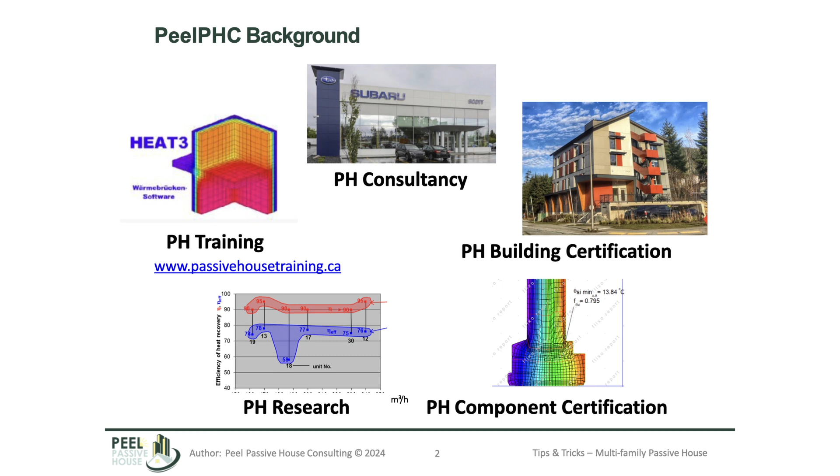So just a little bit of background before I get into my session. At Peel Passive House Consulting, we do everything Passive House. I like to joke that I eat, sleep, and breathe Passive House because it's all I do for work. And we work in a variety of different categories across the Passive House industry, from training, certification, consultancy, component certification, and a lot of research and development. So everything to do with Passive House, which is very nice and refreshing.

So for today's agenda, I'm going to be sharing some tips and tricks that I've learned over my years of experience helping design teams certify Passive House projects. I've tailored it down to the 5 principles of Passive House to make it a bit more common, and I've tried to not get too technical with things. Then I'll talk about some energy optimizations that we typically want to employ in our buildings, and then a bit of a summary of how we can come together with all of these different options to get what we want, which is certification, hopefully.

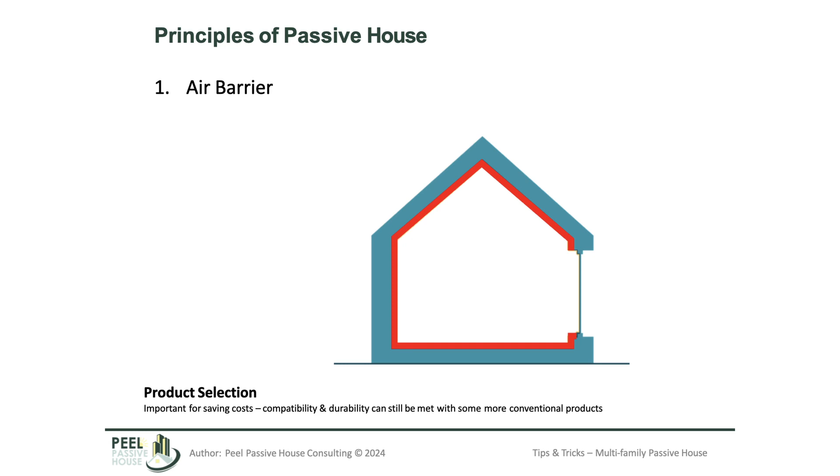So for the first principle of Passive House, we're looking at our air barrier. Everybody knows generally that we're looking for a continuous air barrier. But what we often run into is people getting sticker shock with different pricing and different products, and even unfamiliarity with switching away from what they're used to. When we're trying to use more conventional or more competitively priced building products, because we're always looking at our bottom line and how much it's going to cost us to build these projects, we've had some success over the years with various more conventional products.

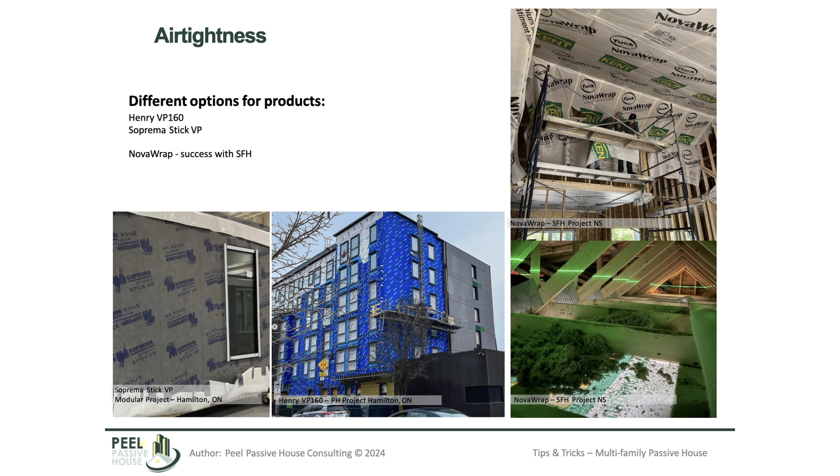So we've had a couple projects use the Soprema Stick VP, we've had the Henry VP 160, and then I've got a project here on the very right-hand side. It's a single-family home where we used Nova Wrap, which is a local product, I believe it's made in Truro. It's my brother's house, and he ended up achieving less than 1 ACH by using that product on the inside of his house. We did all the hygrothermal modeling to determine if he had condensation risk, and it all came out really great. So we're hopeful that's going to have long-term results, which is very exciting because it's a very, very economical product to use.

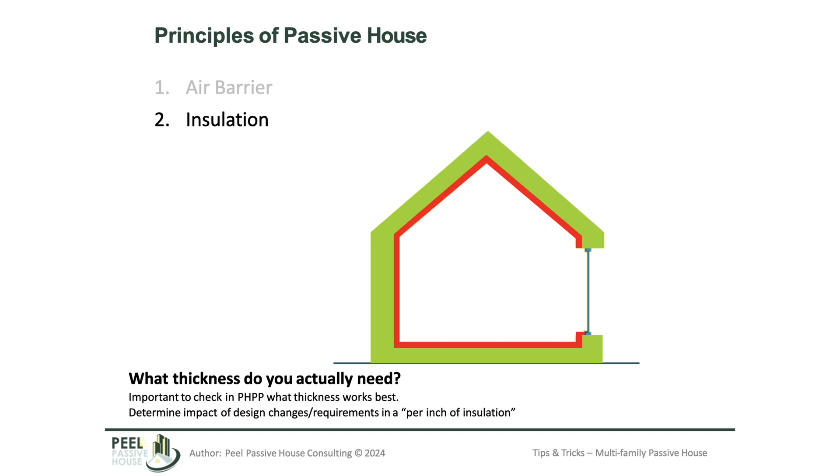Next up on our principles is insulation. Regardless of where you are in our part of the world, you're going to need a lot of insulation to meet Passive House standards. But one of the things we always look back to when doing our analysis for consulting work is we relate any design change to what that is equivalent to in an inch of insulation. So if, for example, you want to change windows or change a different insulation, it all comes back to the knock-on effect: do you have to increase your insulation, or if you've improved performance, can you actually reduce your insulation?

So I've got some really cool examples about how we were able to work through some projects and actually reduce the amount of insulation in our envelope in multifamily buildings based off of other optimizations we were able to make. And here's one of those examples.

So it's kind of important, we find early in design, to carry maybe a little bit more insulation than what we think we'll end up with, just so we have that in the budget or for our model, if we're working with a newer team, for thermal bridging and that kind of stuff. But it just kind of speaks to the amount of insulation and also the size of your project. We find with larger projects, you can actually use a little bit less insulation on your walls and still achieve Passive House standards and still achieve your thermal comfort.

So I had a 4-story building go up in Windsor, Ontario, and we were able to use EIFS with a 6-inch insulation thickness and still achieve Passive House standards. We didn't have to do 8 inches or 10 inches of insulation. So it was kind of impactful. The larger your projects, the more flexibility you have with this. It's not always going to be 10, 12 inches of insulation.

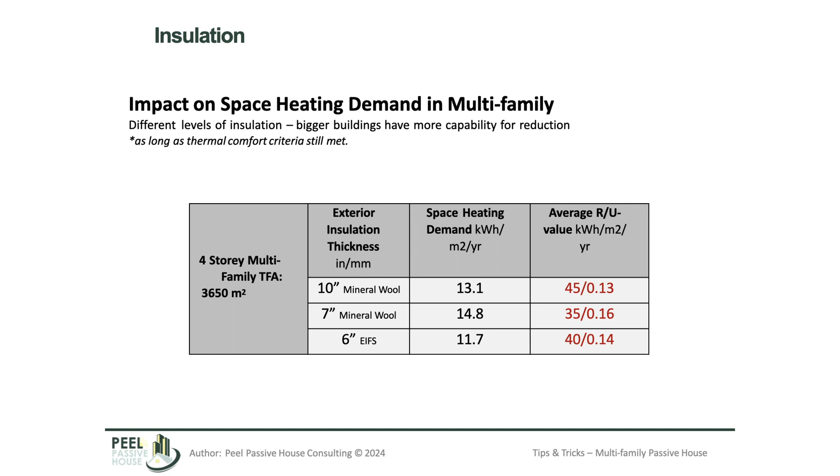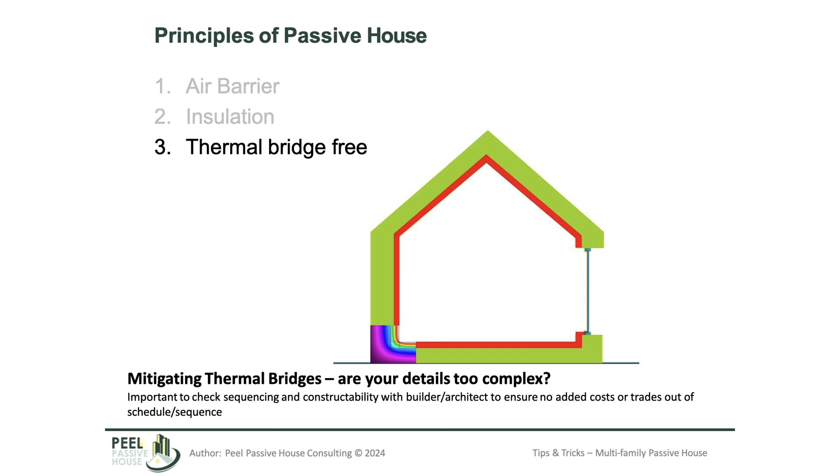Here's an example of something that is not simple. This has 4 different types of insulation in it and a lot of different things going on. As you can see from the thermal image though, it performed really well thermally, but how anybody would ever build this on a budget, I have no idea. So we always try to make sure that we're doing something as simple as possible and we're being mindful of the sequencing. So when people are going to be on site, what their jobs are, what their trades are, and we're not having them come back or overlap with each other.

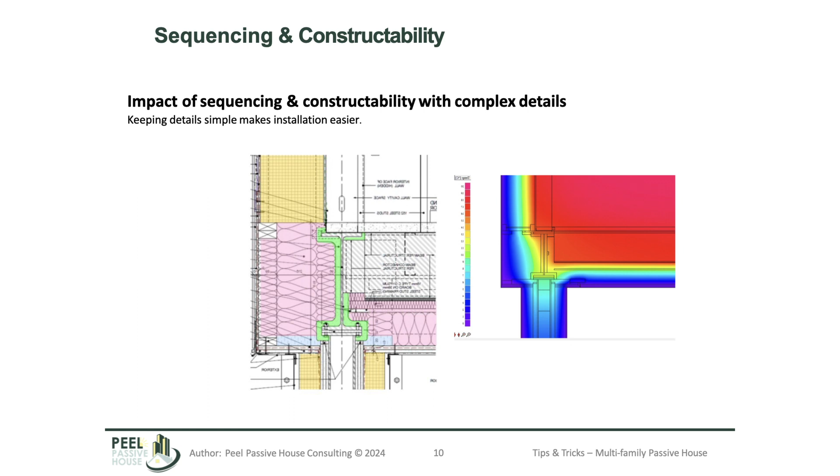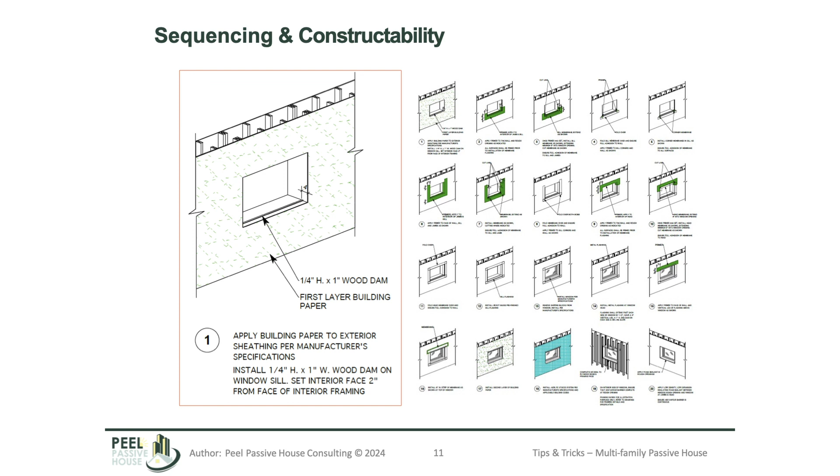And we always work towards making everything sequenced. So if it's a project team that hasn't done a passive house before, we want to make sure that everything is spelled out simply. So we're using color coding in our drawings and our detailing to show you have this sheet membrane, or this dashed line represents a different type of tape, and all of that is very clear. So whoever's building it on site knows exactly what they have to do, and everything is sequenced for the order of operations. So when different trades show up, we know what's happening.

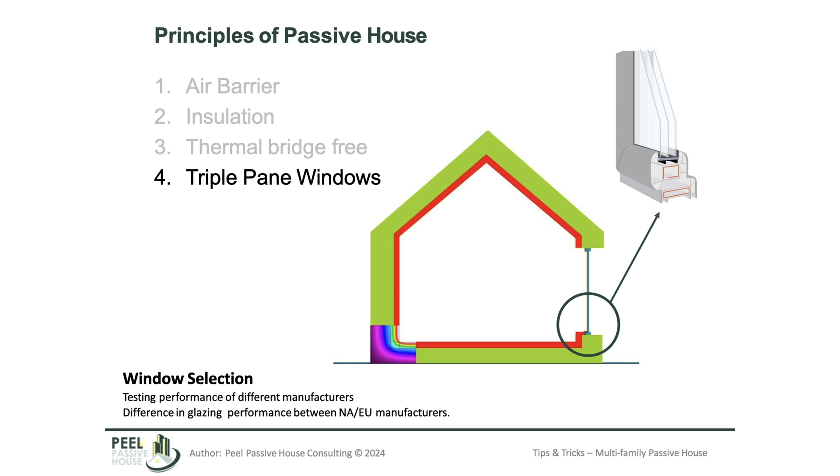The 4th principle of Passive House is triple pane windows. This is a big one that we find because some of our projects, and a lot of my projects, are multifamily social housing projects. So the budgets are really tight. There's a lot of funding incentives that these organizations are working with and very limited capital costs for the initial investment. And what we're trying to do is source something that works from a performance standard, but also works from a cost standard.

I had one project that priced 10 different window suppliers and ended up with what they presumed to be the most economical, but then they ended up with more problems down the road. So it's not always about the cheapest, most cost-effective solution.

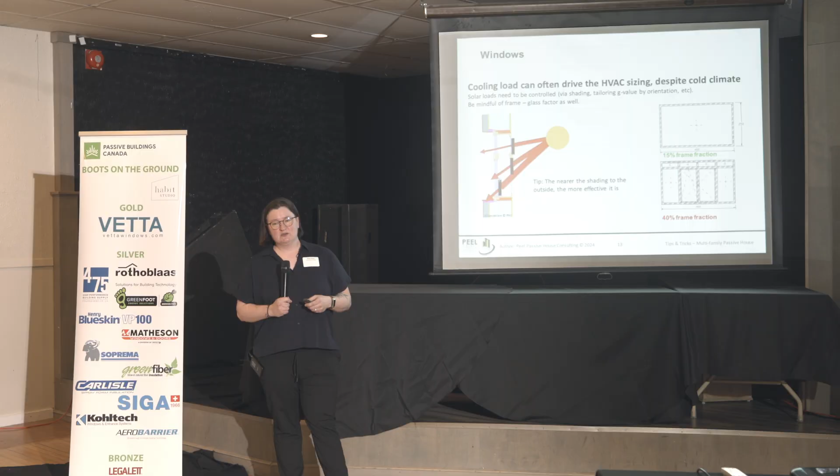One of the things that we find also with respect to windows is in passive house buildings, cooling now becomes our dominant load. So we've made this really airtight box, it's well insulated, we've got a really continuous layer of insulation, we've mitigated our thermal bridging, but what happens to the heat that we generate in our buildings? Especially in high density multifamily projects, we have a lot of people come with equipment, laptops, televisions, whatever, and they're also going to be cooking, and even just being in a building as a person. In this room, I'm sure, you walk out to the windows, it gets a lot cooler because there's less people over there. But what happens is cooling becomes our dominant load.

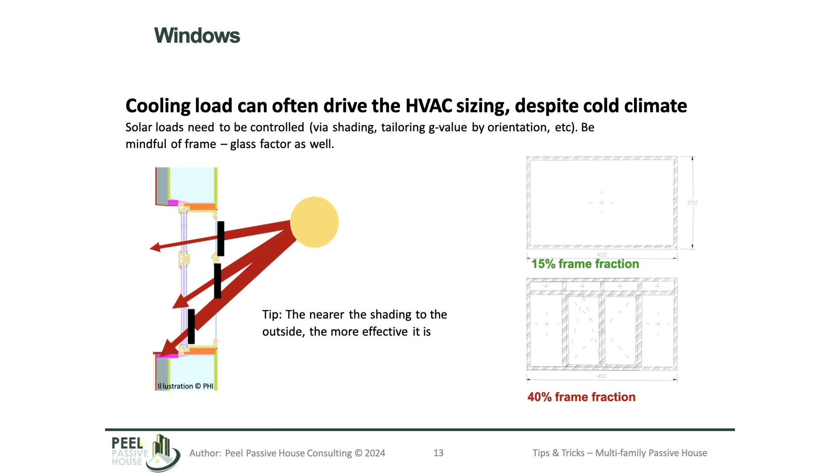So what performance properties we're putting into our windows can sometimes be really impactful for helping minimize our cooling systems. Typically you'd find on a single family home, you might have different glazing ratios on different elevations, depending if you're south, east, or west. But in multifamily projects, we're finding that this is really beneficial to help decrease our cooling system. So maybe we're able to go from a 1-ton unit in a 3-bedroom suite to a 1/2-ton unit for cooling in these suites. So it has this economy of scale where we're able to drastically reduce the cost for the mechanical systems by being mindful of how much heat we're letting into the building.

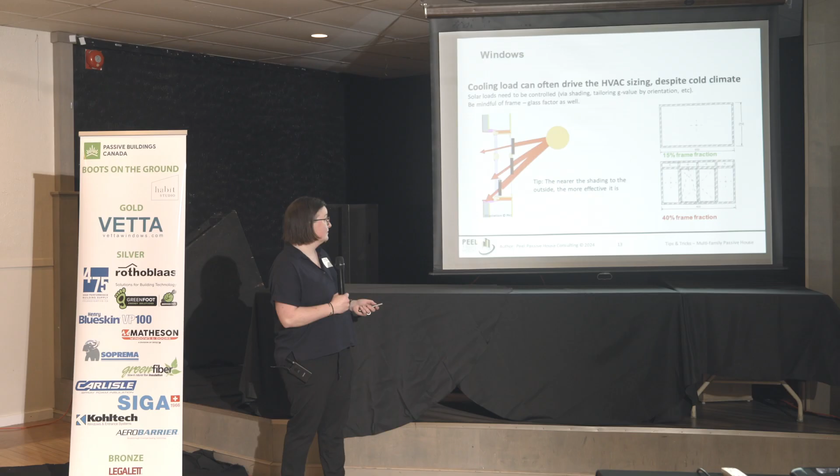So for example, if we went with a better performing window, we could in theory reduce the amount of insulation we had on the outside of our building, which in this case we did. We went from 10 inches to 8 inches.

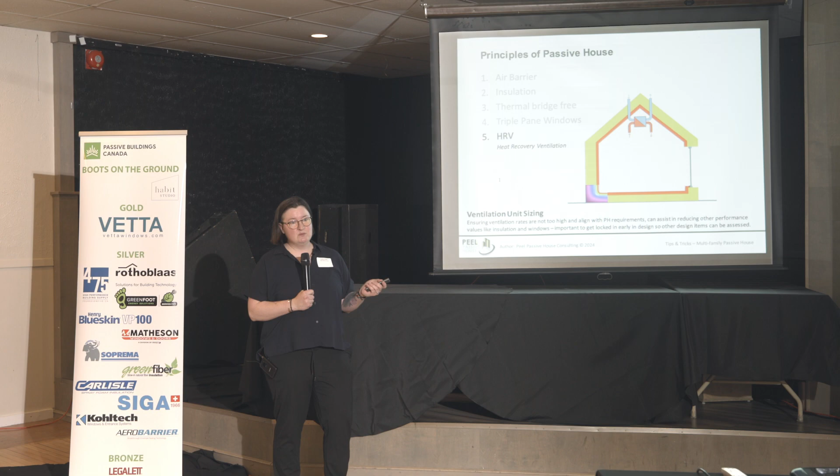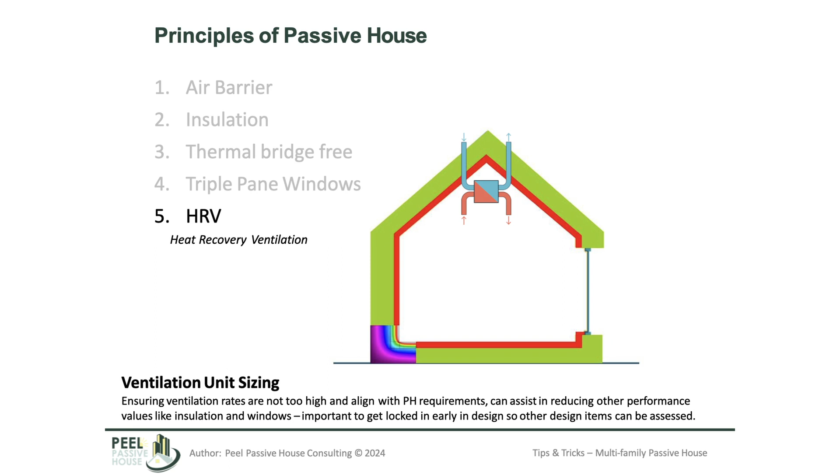And the last principle of passive house I want to speak to is ventilation. Ventilation sizing in passive houses is very important. The amount of airflow we move within our buildings has a direct knock-on effect with our space heating demand, how much energy we're using, and making sure early enough in design that you're sizing the amount of airflow you're providing to each building or each part of the building is very important. Because if you optimize that as best you can, then you have the capability to find the optimizations in other places. It's a very arduous process. I have lots of calls with mechanical engineers on this process.

So here's an example through design for a 4-story building where we went from, so the ventilation air change rate, I'm going to use this lovely pointer. Ventilation air change rate is what the mechanical system is providing for the whole building. So it's kind of like your blower door test, right? How many times the air is being changed every hour. So early in design, we're carrying 0.6, just because we know with the coordination with mechanical engineers, we might end up somewhere around there early in design.

But as we work through and we push them further to help them understand that in passive house buildings, we don't need to have that much air coming into our building because we have a much better envelope. So what we're looking at here is the difference in the impact that your air tightness or your ventilation air change rate has on your project. So because of this, we were able to decrease our exterior insulation from 10 inches to 7 inches, which is a huge cost savings on a 4-story project.

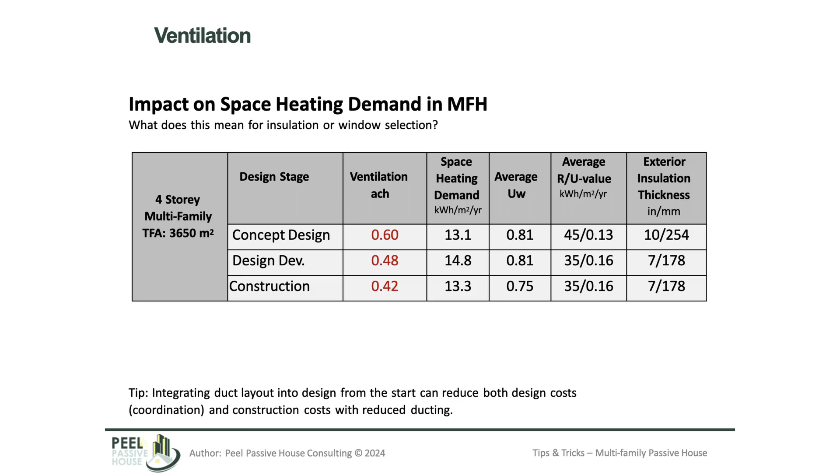So some of the impact of early passive house design, we always say bring everybody in as soon as you can from the onset, because these are the ways that you can help mitigate costs. If you have a passive house consultant or even a certifier brought in early enough on, they can help you understand where these optimizations can be found and help you achieve your levels of insulation that fit best, or your ventilation rates that fit best, or even your windows. And that can really be impactful for the overall cost to help keep everything on track and on budget.

And some of the optimizations that we've employed are things like air admittance valves to reduce the amount of thermal bridging we have through ventilation stacks. We've P-trapped rainwater leaders that come out of the roof from roof drainage. We're looking at simple ventilation strategies, simple detailing, and we've gone so far as to most recently get funding from CMHC to help us come up with a combined domestic hot water heating and cooling solution. So that's going to be something that we're putting through an implementation phase at Peel Passive House as part of our research and development. So we'll be having a lot more to say about that in the coming months as we're more publicly allowed to speak about it.

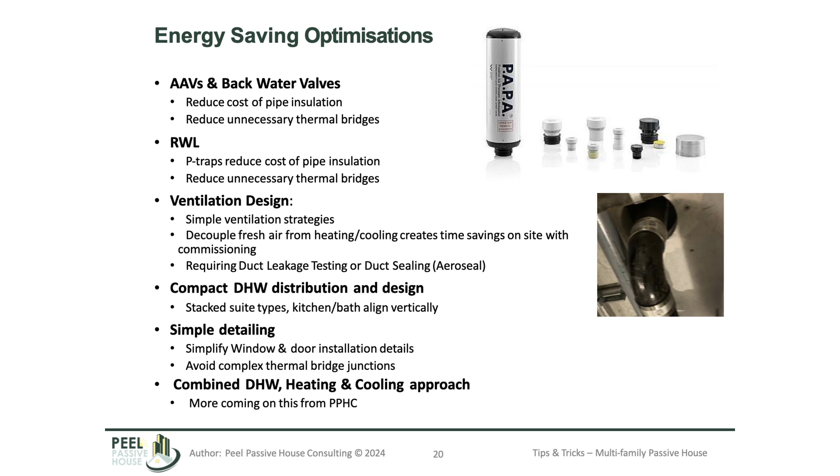So in summary, bring your passive house person on as soon as you can. It is very, very important. If you want to keep everything on budget and you have those design must-haves, you have to be able to work in that tolerance.